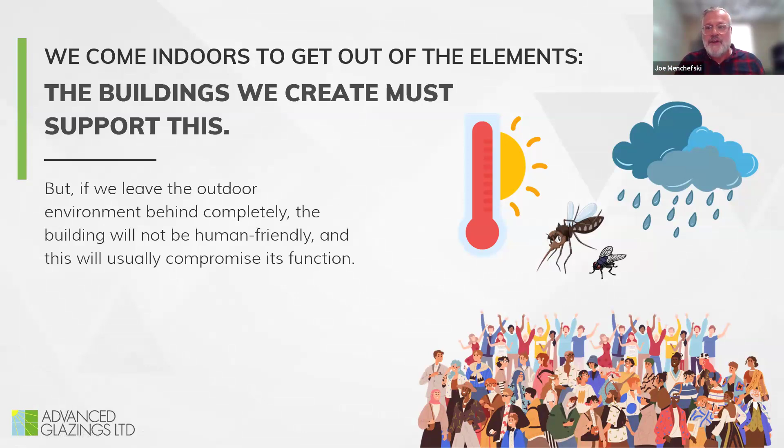All right. Look, so let's start by saying, why do we create buildings in the first place? It's to protect us from the extremes in the weather and potentially critters in some places, but usually it's the extremes in weather. What we've come to discover recently, and the evidence is just mounting constantly, is that if we isolate ourselves too much from the outside world, it has a really serious negative impact on our health, right? So managing that connection to the outside world is absolutely critical, and mostly it's done with the facade, right?

Now you've got two extremes, both of which are not ideal, right? One is where you just don't put any sort of windows, any sort of openings in the building, and you completely isolate the people inside from the outside. We don't want that ever to happen. And then the other extreme is if you had a building completely made of glass, which we're going to take a look at, which is equally problematic. Okay. What you want to do is get the balance right. And that's what we're going to focus on.

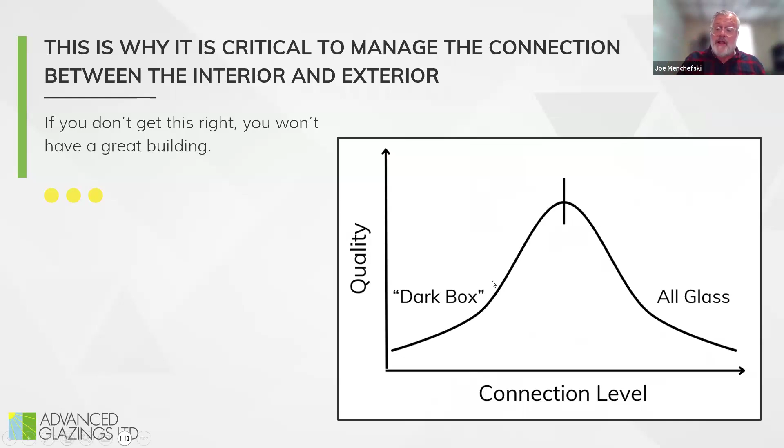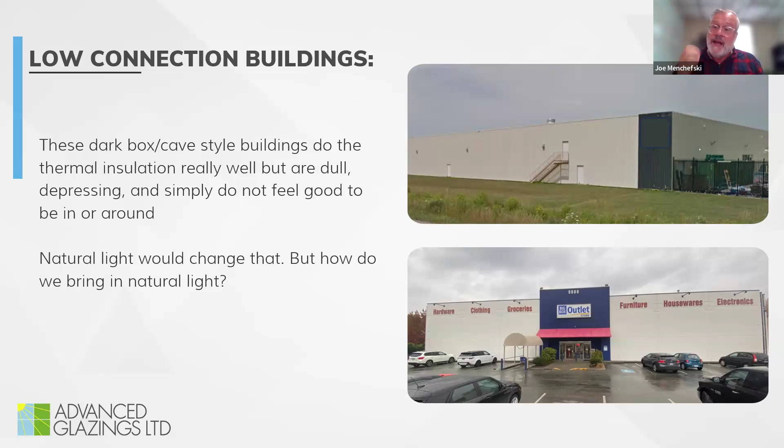Low connection buildings like these, they have a place, they have a purpose. As I said earlier, if you've got somebody coming in and going right out, or you don't have a lot of humans in there, it's cool, but they're not very interesting buildings. They're not a very high value building, right? We all know we're being driven as low on cost as we possibly can be when we create buildings like that, and that's what we're trying to avoid, right? Similar, sort of conventional builds. These buildings are not all that interesting. They're not exciting, and they're not all that pleasurable to be in, right?

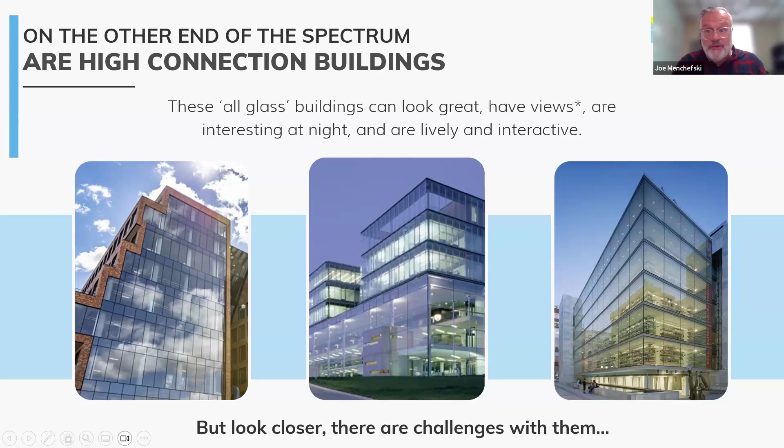Now let's go to the other extreme. Yeah, I know this isn't a big part of your world typically, but there's a lot of buildings that have been created that are just all transparent glass, right? And they're exciting, they're interesting, they're architecturally interesting, but they have some serious issues, and it's because they're too connected. All right. And let me explain that by showing all the issues.

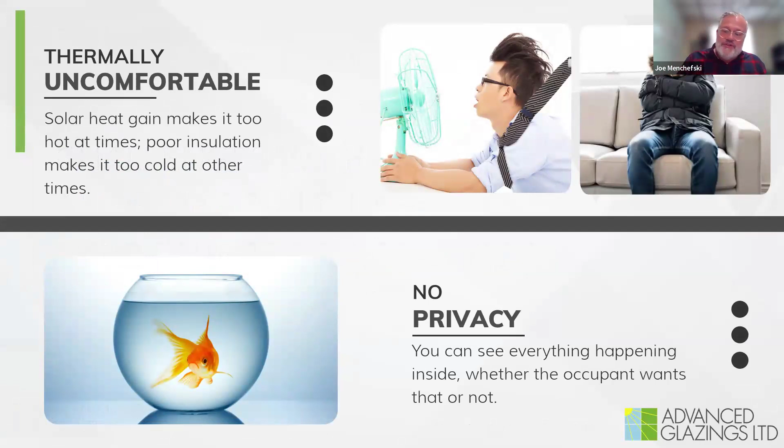First of all, thermally uncomfortable. We've all sat in the airport and had half of our face on fire because of the direct sun beaming on our faces. There's no privacy at all. The energy performance is crap, right? It's all R2 to R3 on the entire building envelope. So it's going to cost a fortune to heat and cool those buildings.

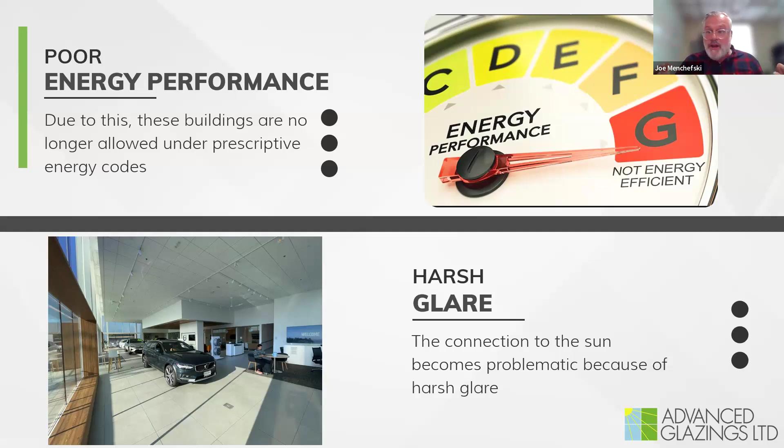It's also hard on HVAC systems too. If you've got certain areas that are bringing in a whole lot of solar heat gain and other areas that aren't, then it's much more difficult for the HVAC to balance all of that energy. So you don't want the hotspots.

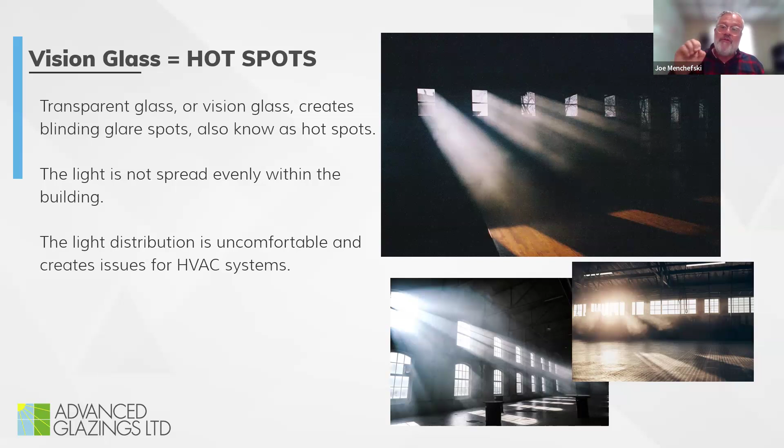Okay. Now, how do we end up in this situation where we have buildings that are too disconnected and then buildings that are way too connected? It's because historically we've only had two types of building envelope materials to deal with. One is elements that are completely opaque, right? Which you need. And then the other is elements that are completely transparent. It's binary, right?

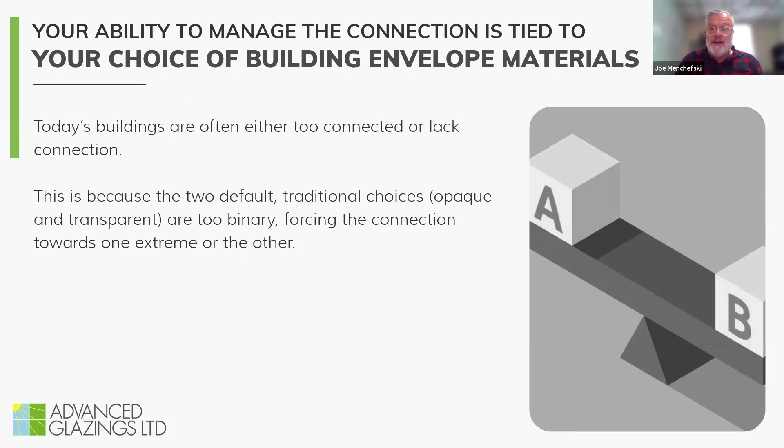And when you have those two extremes, you tend to have extreme situations in your design. When you look at all the things that you want in a building envelope material, all the boxes that you want to tick, we get most of them when we just have opaque and transparent. We get the good views. The opaque will provide thermal insulation and privacy, and the transparent component will add some excitement to your building.

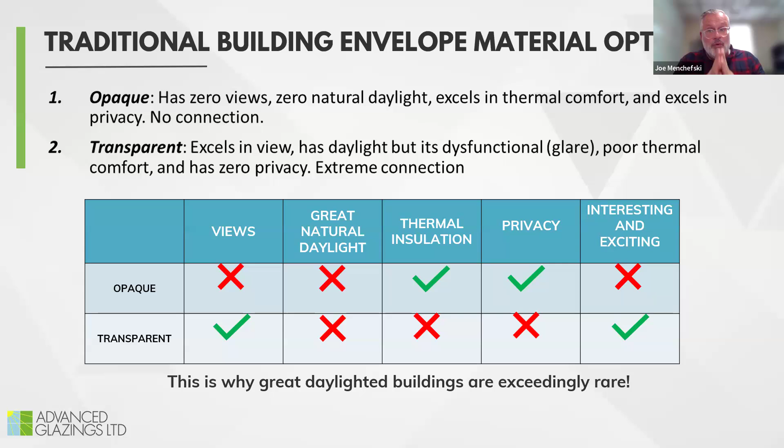But what you're not getting is the great natural light, right? The free natural light that makes us healthier and more productive. Okay, so what's the answer? What we're going to propose today is that the solution is what we're going to call an ideal translucent glazing, a glazing that brings in light and diffuses it and softens it.

So if you have an ideal translucent, look at the chart now. We weren't getting the great natural daylight before, but now we're getting it because we're getting a soft diffuse light that's going to spread evenly everywhere, get rid of the hot spots and get rid of the pain of extreme glare that is very difficult for our vision to adjust to.

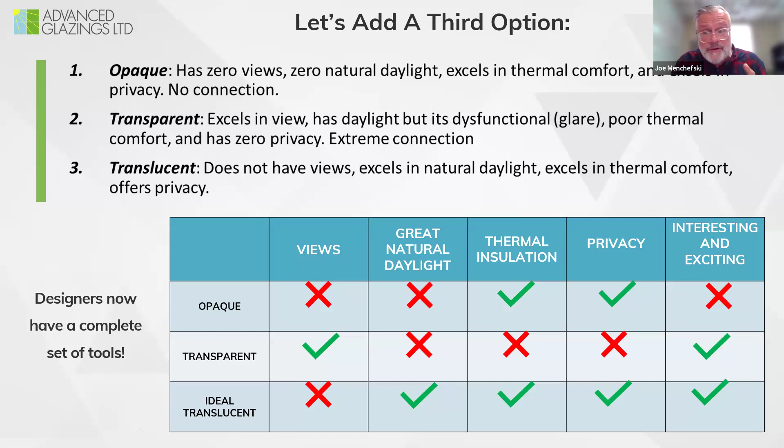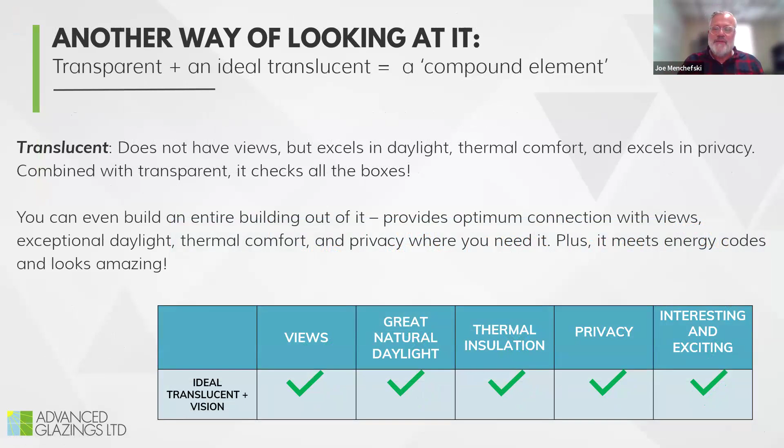We will still get high thermal insulation, and the ideal translucent will also have high levels of insulation. You're still going to get the privacy, and you're going to have a more beautiful building, and a more functional building, which is going to sell for more. You can actually get there with just transparent and translucent glass together, because the ideal translucent has such high levels of insulation that you'll actually be able to meet building codes now with just the two types of glass. Probably not where we're going, but I want to point that out.

Look at a couple of examples. The image up in the right-hand corner, probably typical of a lot of the work that you folks do. It's an ice rink, a skating rink. The entire place is being illuminated for free with 6 feet of clerestory around the perimeter because the translucent is spreading the light evenly.

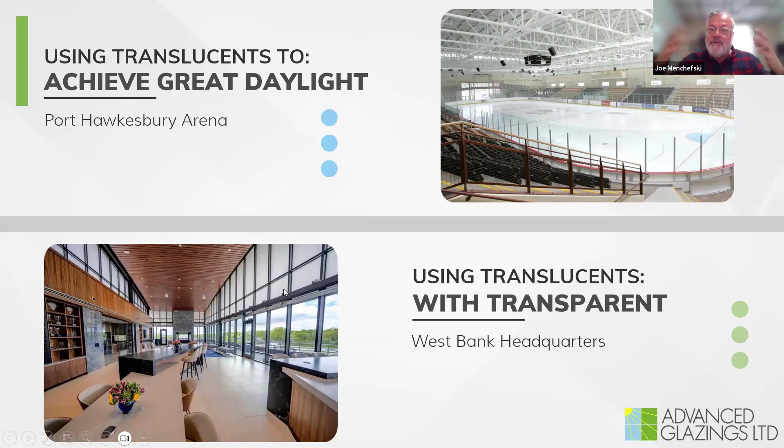Translucents and transparents together. How do you keep the blinds off the windows? You do it by making sure that the space is bright enough that the light that comes in through the transparent part is not going to be in contrast with the overall light level in the space. So they work together beautifully, transparent down where the people are to look outside. This would be like a reception area or something like that. And then at the top, you've got the translucent, which is your source for the natural daylight.

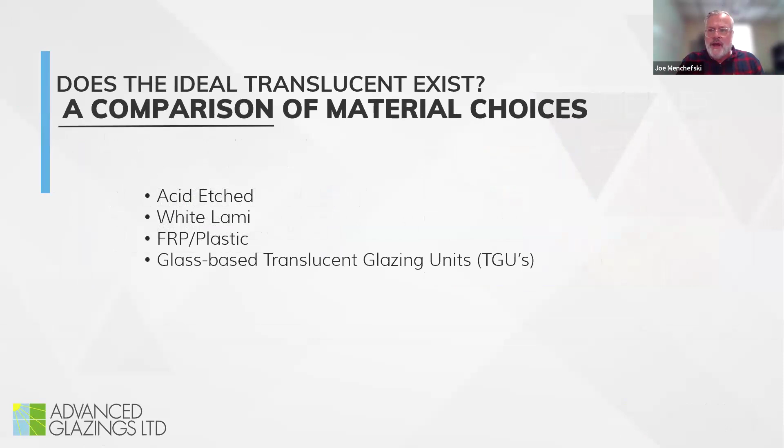Okay. So what's an ideal translucent? How do you decide what is the best thing to put on your building? Let's look at 4 of them, and we're going to then do an evaluation of the 4. We're going to look at acid etched glass, white laminate glass, your sort of traditional legacy FRP plastics, and what we believe is the answer, the glass-based translucent.

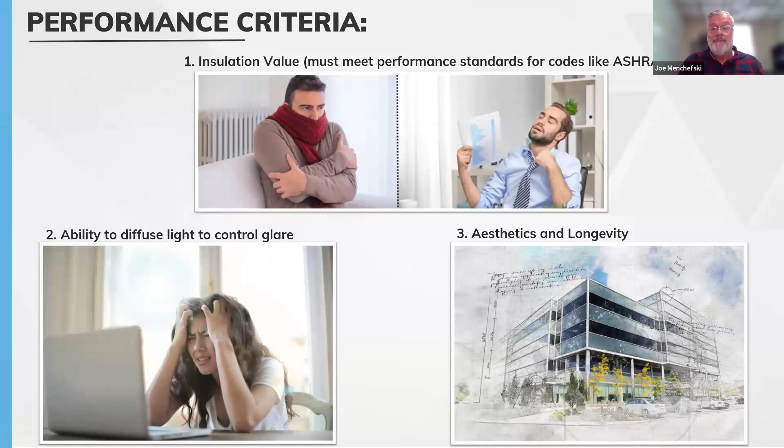Okay, and we're going to evaluate each of them against 3 criteria. The first being insulation value, the second being the ability to diffuse light and eliminate glare, and the third being the ability to last for a long time. Now, let's talk insulation.

If you want to get away from that 30% window to wall ratio, which is a prescriptive code, and just get to a performance code, right? So it doesn't matter how much window is there, then you need to get above a certain level of insulation value. You're not ever going to get there with a traditional IGU, vision glass, acid etched, or white laminate. You have to move to something that has a higher level of insulation.

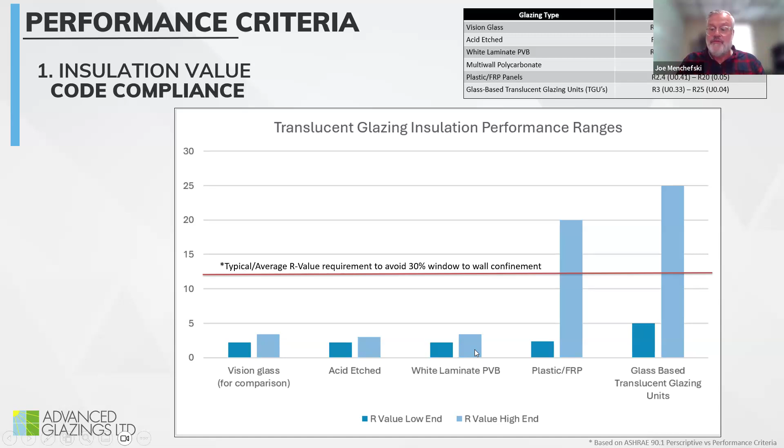Okay. Now we're going to talk about the ability to diffuse light, to eliminate the glare, to eliminate the hot spots. All right. And I'm going to introduce a new idea called light diffusion power.

Was there a question? No. Okay. Sorry.

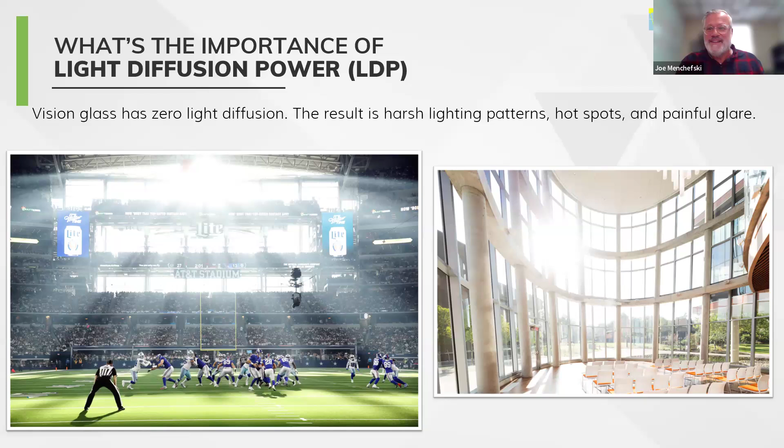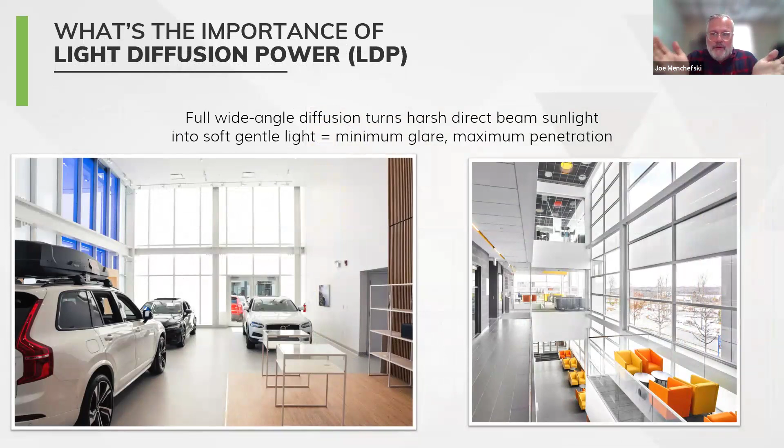Straight sunlight that isn't mitigated in any way is very problematic sometimes. We all know what's been happening in Dallas lately, and it really highlights the issues that come when you don't control sunlight. Poor diffusion can actually make it worse because you're directing some of that light towards your eyes and actually increasing the pain of the glare. In order to eliminate those glare issues, to eliminate the hotspots, you need to diffuse the light very broadly, spread it very evenly in the space. So let me introduce a simple concept called light diffusion power.

All right. Here's the experimental setup for measuring light diffusion power. You take a glazing sample, take your window, right? First you put an opaque backing on the window and you cut a hole in it. Shine a light down at 45 degrees, right? And then measure around this 180-degree arc around the back, and that'll show you where the light goes after it passes through your glazing.

Transparent glass, this first image in the middle here, is doing exactly what it needs to do. In order to be able to see through it, and views are important too, it cannot change the directionality of the light at all. So the light's coming down at 45 and it all strikes at minus 45. Perfect. Except for when it comes to glare, right? Because you get these bright spots, hot spots as we call them, and the image on the upper right hand corner is computer generated, but it really drives home how you get those really bright spots. We've all seen them, with the nice sharp edges on them.

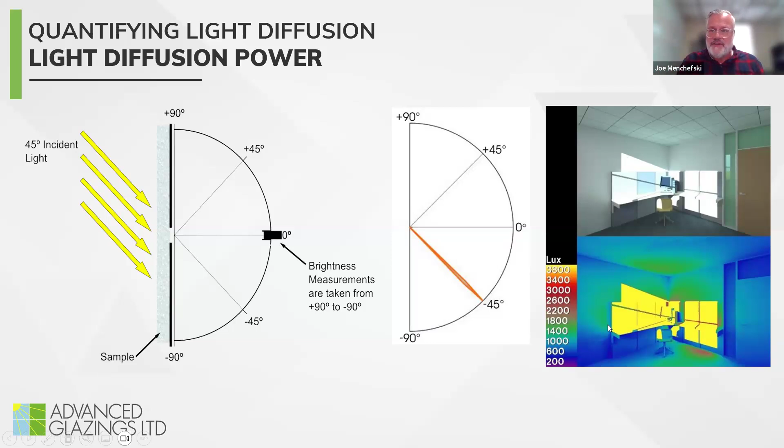Below is what's called a false color rendering. Don't worry about it too much, but what it's doing is being able to tell you exactly what the light level is in that space. So if you're building a building that's going for LEED or something like that, this can be very advantageous. It also helps to show that the contrast isn't too bad.

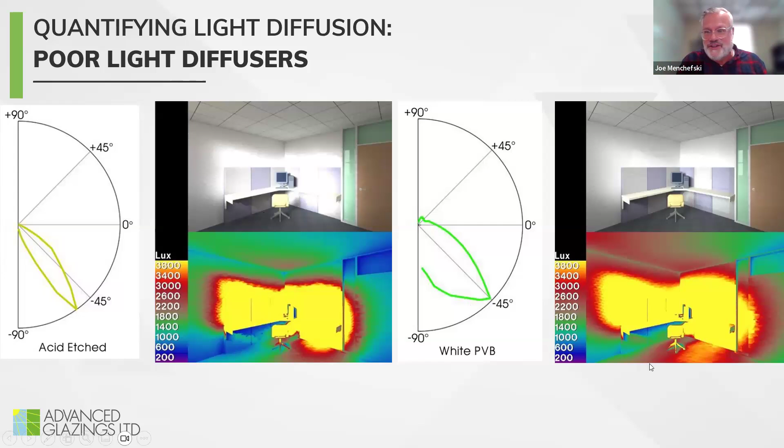Let's look at acid etched glass and white laminate glass as well. You can see from their charts that you're only spreading the light a little bit. All you're doing is spreading the light enough to give you visual obscurity, to give you privacy. They're privacy products, not products for bringing in soft, natural light, okay? Look at the way the light actually hits, right? You're still getting that really, really bright spot. The only difference is that the edges are fuzzy instead of being nice straight lines, okay?

And if it goes up, it bounces off the ceiling, bounces off the walls, and it goes deeper into the building. So you can get way more of the building daylighted without having to put skylights in a lot of situations. If you've got a big enough floor plate, you're going to have to do the skylights. But in a lot of situations, we can daylight a really large area just from the vertical.

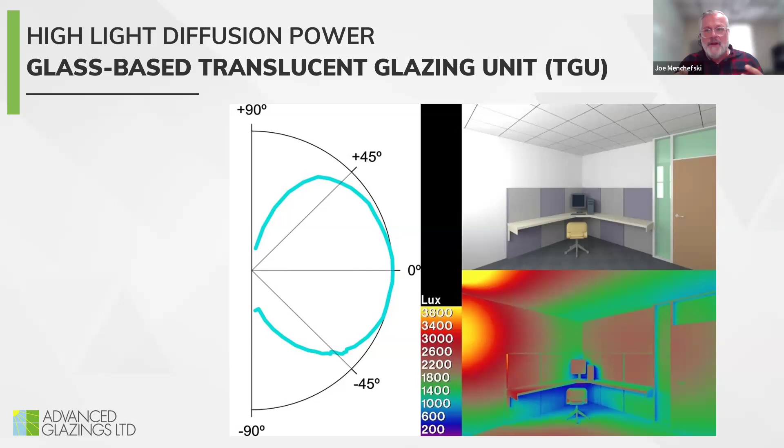Okay, again, let's review. You know, this is what vision glass is going to do. It provides your views, but it's not a good tool for bringing in natural light. Acid etched, not going to cut it, but a good high light diffusion power translucent will give you a nice even distribution of the light in the space.

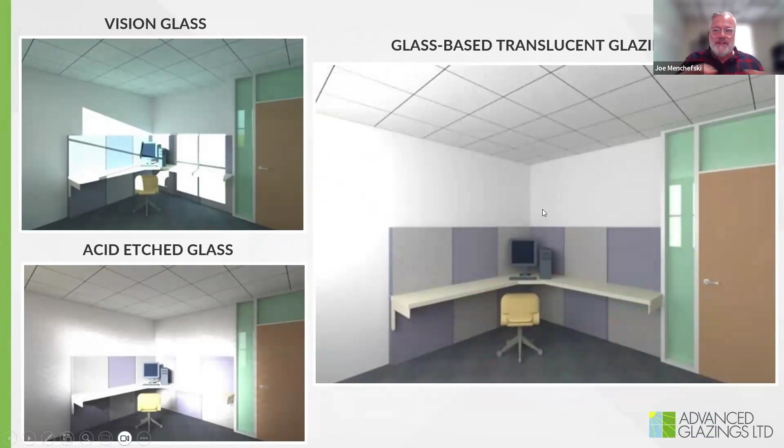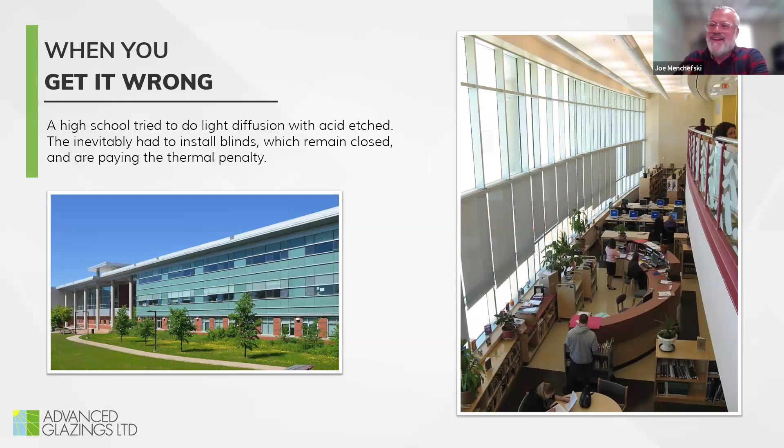All right. When you get it wrong, this is a school up here in Canada, close to where I'm sitting today, where they decided that acid etch was going to be adequate. And almost immediately upon moving in, they had to put blinds up and completely cover those windows. So now they've got a big section of wall that's about an R2, right? And they can't see through it. And it's not bringing any light in because they've covered the glazed area. Doesn't make any sense at all.

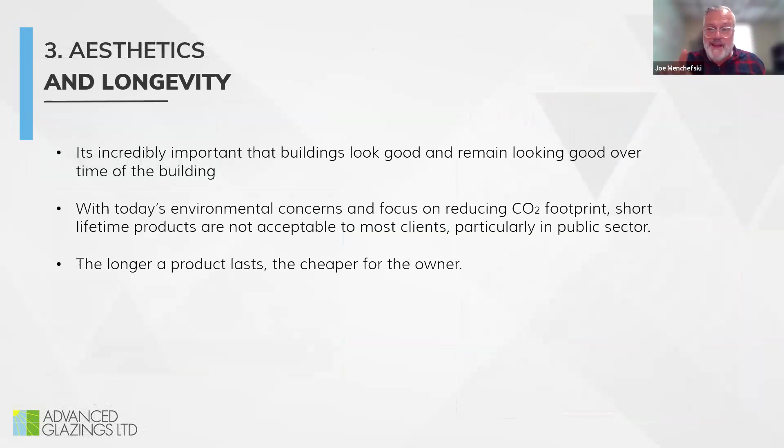Okay. Anyway, so we've talked about thermal insulation. We've talked about the ability to diffuse light and eliminate glare. Now let's talk about longevity and aesthetics, right? It's important to think about how long things are going to remain on the side of the building if your objective is to build a higher value building. Okay. Let's talk about aesthetics and longevity in the context of the four translucents that we're looking at.

Acid etched, it's glass, it looks great, it's always going to look great, right? Same with white laminate. Some people don't think it's all that beautiful because it's kind of flat, but I think it's just fine. I like the white aesthetic. Glass-based translucent, it's glass. It's gonna look good from day one. It's gonna look good in 50 years.

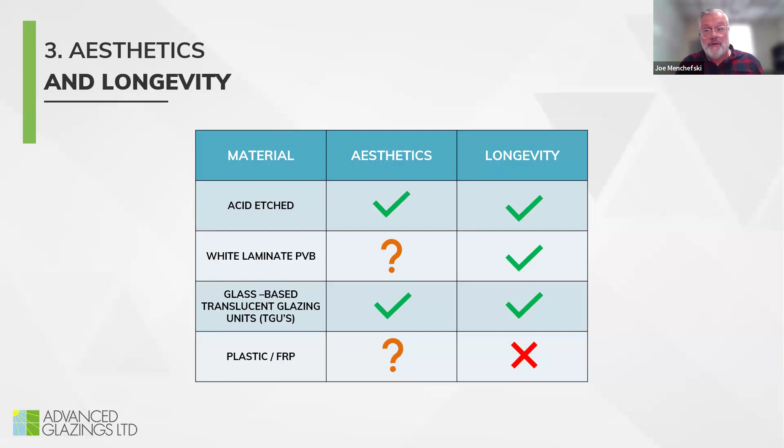Okay. Plastic is your issue when it comes to longevity. Some of these plastics do an amazing job with insulation, and they also diffuse light very, very well, but they're plastics. Okay, and what that means is the moment they're put out in the sunshine, the UV light starts bombarding them, and you start to shift color almost right away. All right, so let's take a look at that.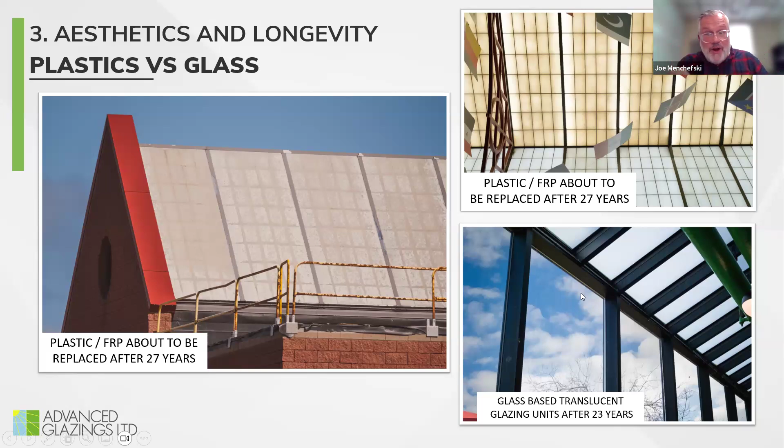Look at the glass-based translucent on the bottom here. It was installed just a couple of years later, and I could take you all there today, it looks the same today as it did the day it was installed.

Just to drive the point home one more time, this is an actual untouched photo of a project that was done in multiple stages. The image on the left has the glass-based translucent. The image on the right still has the older FRP plastic in there, and you can see the yellowness. It looks dingy. It actually looks dingy everywhere inside of that side of the hallway because the brownness of the plastic is changing the hue.

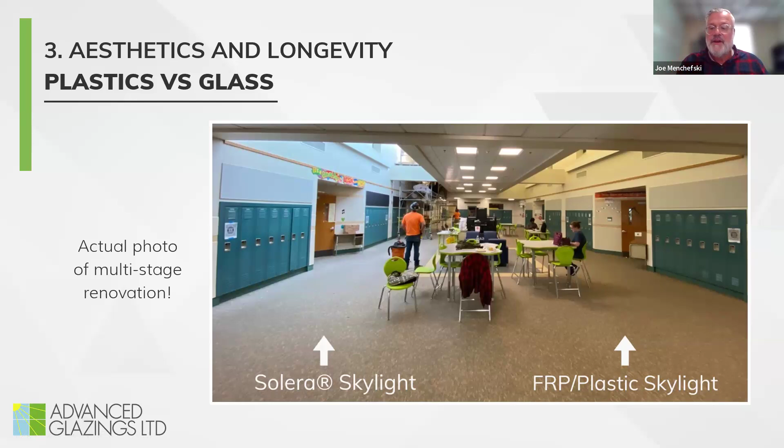Right. So again, if you're looking at something that's going to be close to town, it's going to be a community center, it's going to have a lot of people coming and going from the building, you do not want to be putting a legacy, single-use, short lifespan plastic on the building envelope. Okay. And it's costly, right? Each time you have to do a replacement, it's costly to the owner of that building because you're also seeing inflation. So each replacement is going to cost more, right? So instead of putting something on that you only have to put on once, you're putting something on that you have to put on at least 3 times.

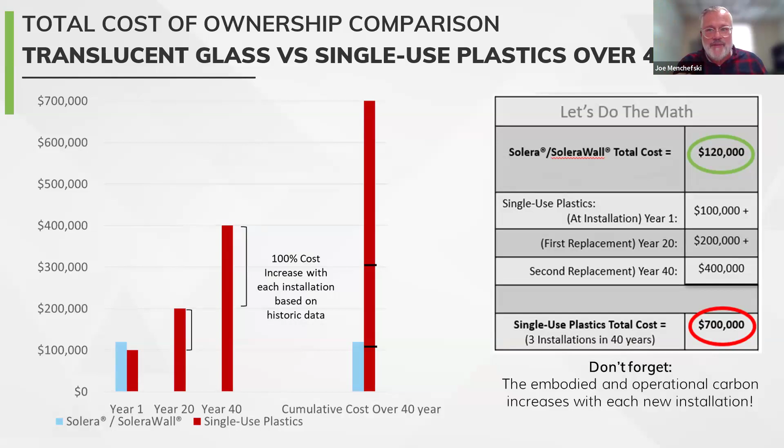And for people who are interested in sustainability, that's embodied carbon every single time you have to do the replacement. It's energy consumption every time you have to do the replacement. It's not optimal, right? So, summarize all of that. Acid etched and white laminate, they look good. They're going to last a long time. They're not there to help you light a space, right?

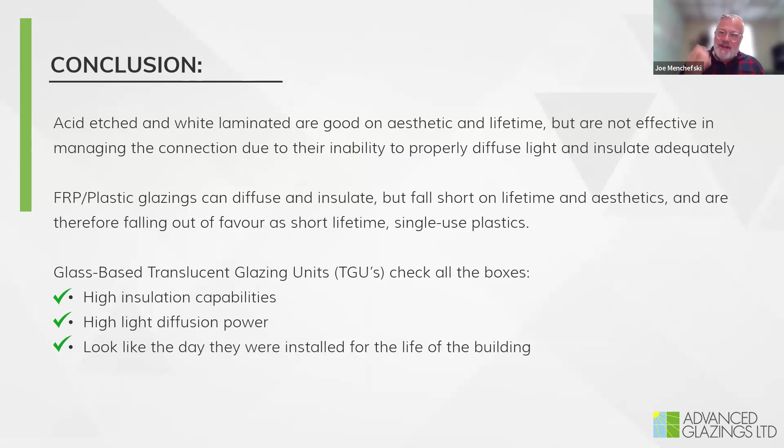Plastics, brilliant invention, and they still have their place, right? But if it's closer to a place where there's traffic, where people are going to see it, and where some pride of ownership is important, you don't want to do that. If you've got humans inside and you're asking them to work in yellow spaces, that's not optimal either, right? So the glass-based translucent actually checks all of the boxes on the criteria we just discussed.

Okay, that's how we get to the balance, is by adding that third element. The translucent allows you to bring natural light in, right? You don't need to have all that transparency, right?

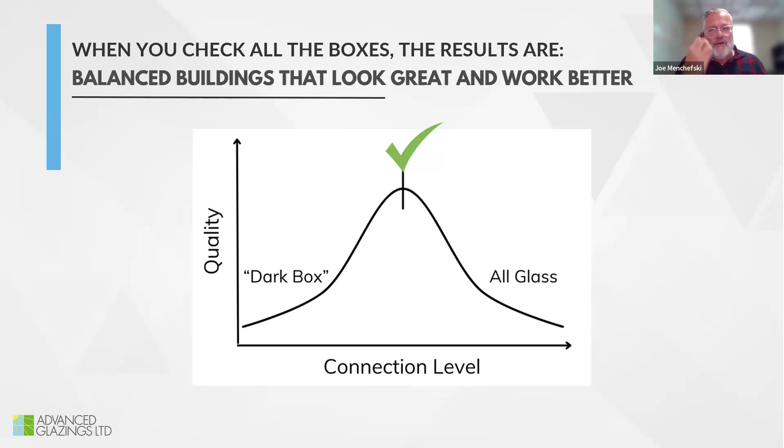And you don't need to eliminate the opaque elements either. It doesn't make any sense. You can have a relatively small glazed area and bring in a whole lot of natural light without cutting a whole lot of holes. That's the key, right? Get the balance exactly right. And you can create these really nice looking spaces.

Okay. For the architects in the room, everybody who's survived me chatting so far, guess what? All of you have earned your AIA credits, and bear with me for just a little bit longer.

I want to talk about Solera and Solera Wall. And then we're going to talk about integrating it with Adam's product in order to make it really easy and cost effective to get it into your buildings. Now, how does Solera work? You got light diffusion, you got high levels of insulation. Here's how you achieve both.

First of all, the light diffusion. We put a glass fiber veil on the inside of the IGU. It's that simple. The glass fiber veil is amazing at diffusing light, and we figured out how to attach it to glass without it ever degrading. Okay, we also have this honeycomb structure, right? Series of little squares in between the 2 panes of glass, and the little squares break up the convection patterns, right? So if the air is not moving between the 2 panes of glass, you get much higher levels of insulation.

If anybody hasn't heard of aerogel, aerogel is a relatively new material that is the most insulating material known to human beings, and it also transmits light. So if we can fill in all the little squares from the honeycomb, fill it up with aerogel, we can get crazy high levels of insulation. I'm talking R18, R25, right? So now we're into places, freezers and cold storage, those sorts of things. You could actually bring light into certain parts of the building and not compromise the insulation levels.

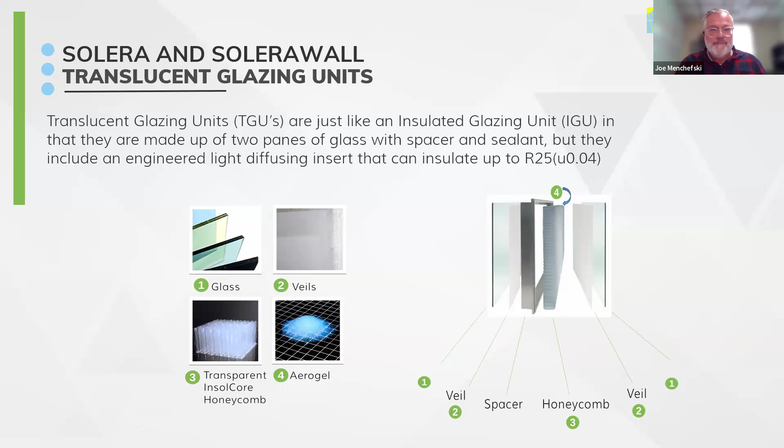Okay. How does it work? How do we get daylighting done properly? Let's talk. It's really easy in the sort of broader areas where you're going to have lots of height and you can just put the windows up nice and high, diffuse the light, and you can illuminate a large area with a relatively small amount of Adam's windows.

But when you're down at floor level, and I'm thinking reception areas are very, very typical, you want the view in many cases, but you don't want them to end up with blinds on the window. So you put the two of them together and you can have both view and daylight. You can literally have your cake and eat it too. All right. So transparent, the light comes down, creates the hotspot on the floor, but it gives you your view. Translucent, right, spreads evenly, illuminates the place beautifully, but you don't have your view.

But if you put them together, here's what happens. Put the translucent on top, the transparent down the bottom where the humans are. The light still comes through the transparent and still creates the hotspot, but it's not much of a hotspot because the translucent is illuminating the whole space. So the ambient light level, right, the entire space gets brighter. The entire room gets brighter. And so even though there's a bright spot on the floor, it doesn't look that bright. It doesn't feel that bright.

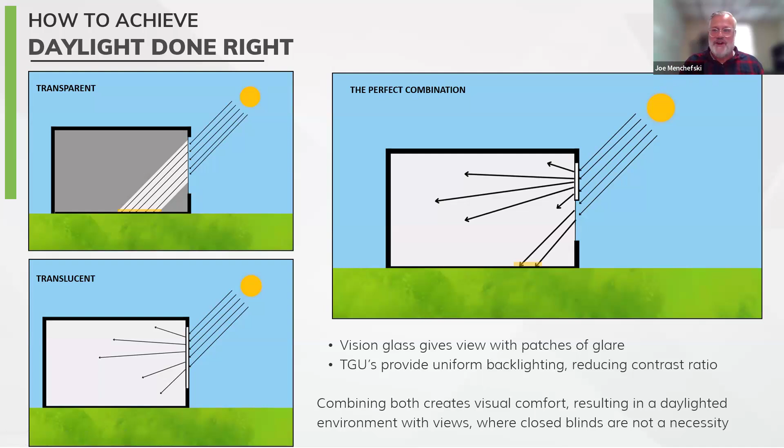It doesn't mess up your HVAC as much because there's energy already coming in. There's light already coming in, and you don't get this really high contrast, and you don't feel the need to put blinds on the windows because you're not experiencing glare. I hope that makes sense. Okay, and we do a lot of this kind of work where we've got the translucent up high to illuminate and the transparent below in order to provide the views.

I'm going to talk quickly about modeling. Okay, there are computer models that can show you exactly what's going to happen inside your building when the sun hits it. Okay, for example, in the upper right hand corner here, and by the way, we do this for free. So if anybody's interested in talking to Adam, or, you know, to put his Solera in Wintech windows into your building, we can model it.

We can show you how much area you need and what it's going to look like inside with and without. Anyway, upper right hand corner in this hockey rink, this is the original design. It was all transparent. That glare pattern is not going to be acceptable. It's uncomfortable, and it also will melt the ice in that area. You have that much solar heat gain. Replace it with Solera on the bottom, and that's what the model shows, that the glare is eliminated.

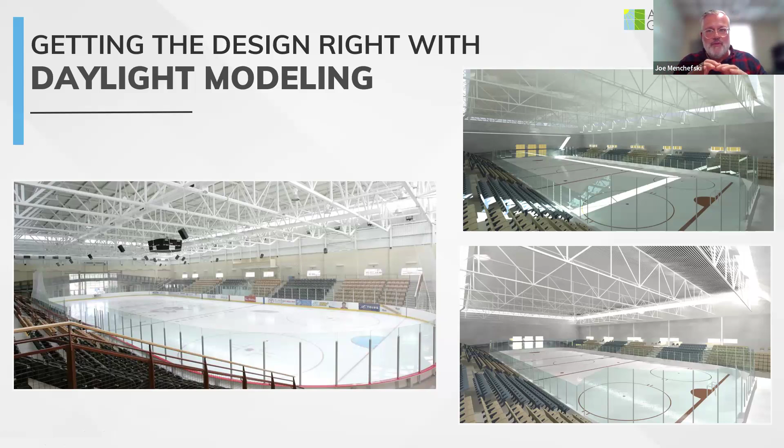The image on the left is an actual photograph of that hockey rink taken from the same angle. That is a massive, massive space, a massive open area, and it's all being illuminated with just 6 feet of clerestory. That's my point from earlier. You can do daylighting with way less window if you diffuse it properly.

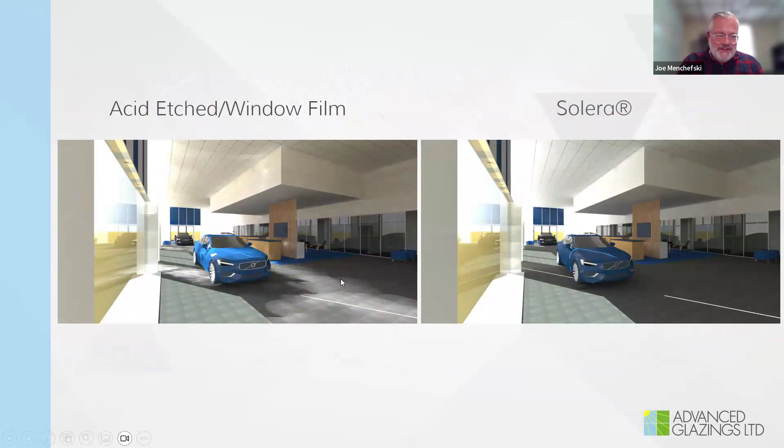Right, back to the Volvo dealerships. You know, this is modeled with an acid etch window plus film, and you can see you've still got glare spots that are pushing deeper into the building. Look at almost the entire floor space where your customers are going to be is suffering from glare. Right, that is not optimal.

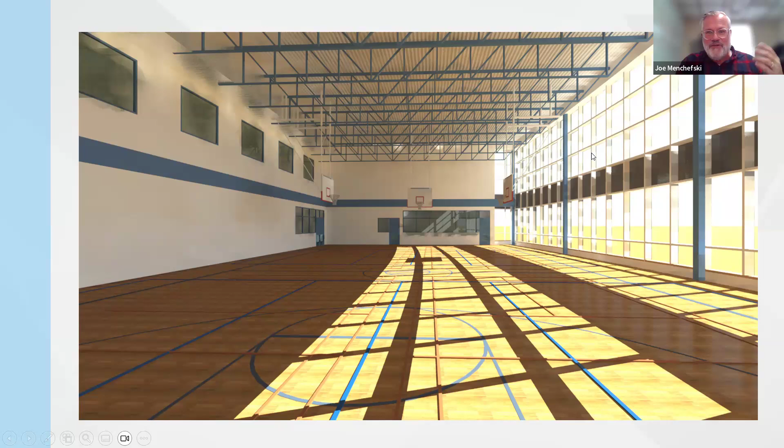Right, this is a very typical situation for us. Gymnasium, transparent glass from floor to ceiling in the original design. That glare pattern is just not going to be acceptable. You won't be able to play basketball there. Replace the top section with Solera. You can see in this simulation, the light is actually bouncing off the ceiling and filling up the space. And this glare is not going to be an issue because the overall ambient light level is so much higher.

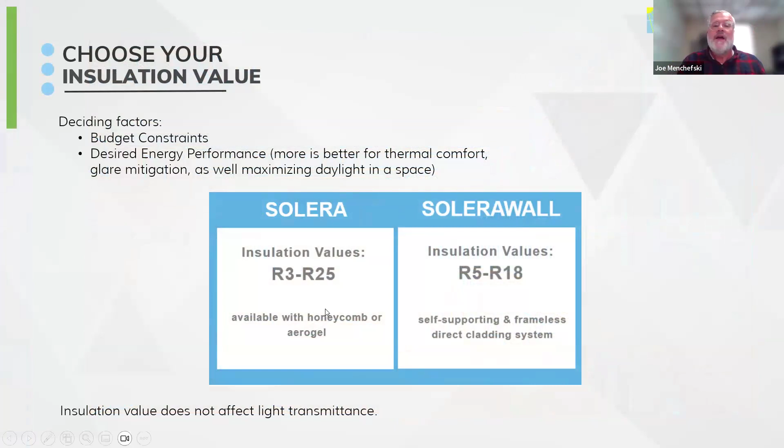Okay, two different types: Solera and Solera Wall. We're going to focus on Solera today primarily, but I will introduce you to Solera Wall. Insulation levels ranging from R3 all the way up to R25. The only difference between Solera and Solera Wall is how you put it on your building.

Okay, so let's talk integration. Solera will fit in sort of your traditional framing where you bring in a glazing contractor and install it into the building, but we're going to show you a better way to do it today. I'm going to introduce Adam again and have him come back and talk about how Wintech has integrated Solera into their framing system and the advantages that come from that.

Adam? Okay, thanks, Joe. I will give a shout out to Bruce Forster with Stewart Berger Construction. He introduced Advanced Glazing and Wintech, and it's been a good partnership from the get-go. I've been in the metal building window business for a lot of years, and I have spoken to countless numbers of builders trying just to get extra light into the building. And when I saw this product for the first time, I was like, wow, this really checks some boxes that the builders are really looking for.

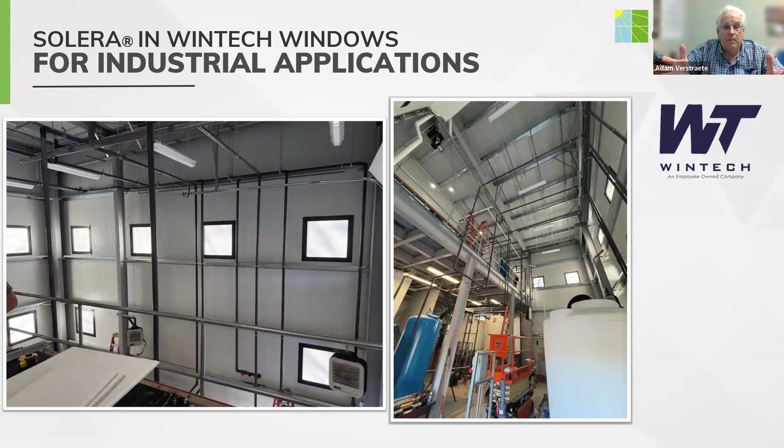Wintech specializes in windows for metal buildings. We make a lot of designs for a lot of different wall panels for punched opening applications. Self-framing, self-flashing allows the builder to install the window fast and easy, and you're putting a window in that's made for the specific wall panel you're dealing with.

This is a job we did for Art Hance. I think a lot of you guys probably know who he is. This is an insulated wall panel, an IMP. It's our standard InsulView window made for the IWP application. And you can look inside this building, there are no lights on. And just look how much light is radiating in that building.

I really liked this product from the get-go. And when I saw that picture, that was one that's really like, wow, that's something. But what really sold me on this product, and I'll tell you this, I went up to Nova Scotia, where these guys' headquarters is, and we toured some buildings. And we were touring the power plant of a hospital that was being built near their office.

And in that office, there was a set of windows, very similar to the windows above the garage doors on the right. About 12-foot by 3-foot running windows in this. It was a boiler room for the power plant for the hospital. The workers were in there installing the boiler with no lights. There was no electricity in the building yet, and they did not have any remote workspace lights put up. They were working on it just with the natural light coming in through the Solera windows in that room.

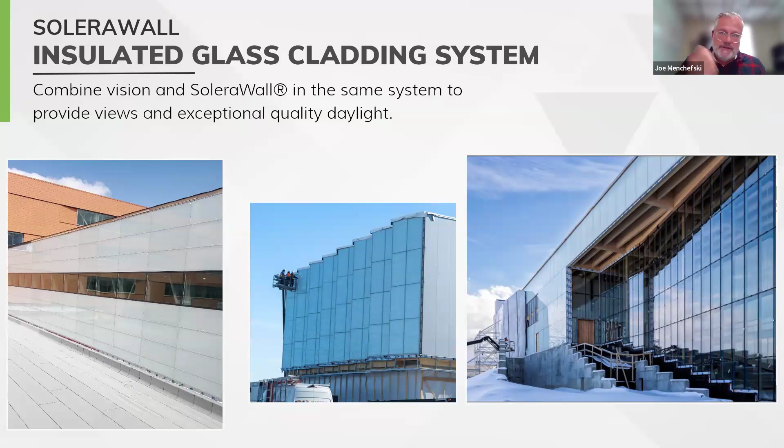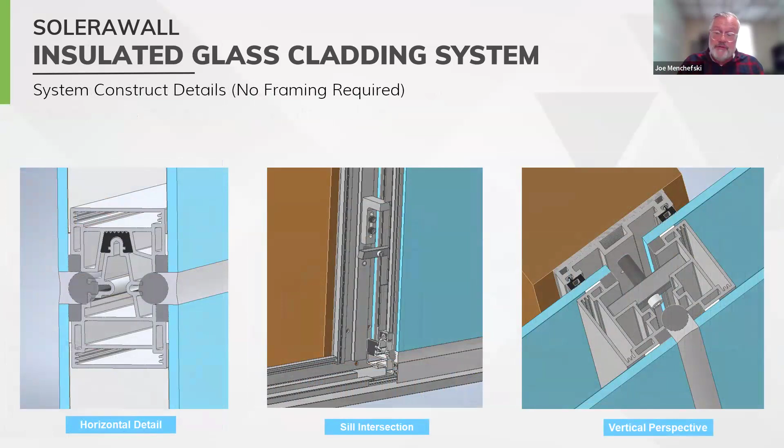Let me introduce you to Solera Wall. This is for really large glazed areas, and it's a panel that doesn't need any framing at all. All right, the panels click together analogously to an insulated metal panel, or sorry, an IMP. Right, they're thicker panels, and the spacer on the IGUs can be designed with a tongue and groove design so that they click together.

Here's a really large job that we did recently, and it's like 13,000 square feet of glass on the outside. Not very typical. This is a little more typical. This actually works out to be about a 30% window to wall ratio, believe it or not. But look inside the space, right? This is what I really want to drive home. Look how bright it is in there. Look how comfortable it is in there. The hot spots are absolutely minimal. It's a very comfortable place to be, right?

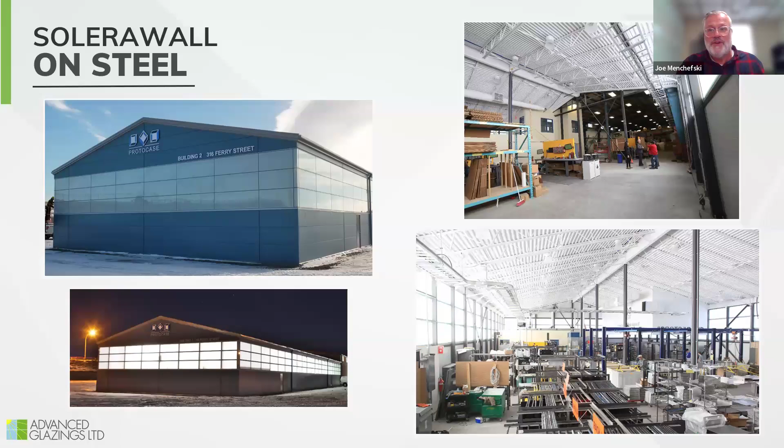You're going to have lower absenteeism, lower turnover, all those things that really, really matter. And remember, I talked about the lantern effect, the glow at night, right? This building, it's an industrial park, but it's close to like an overpass bridge. So everybody driving by sees this building, and they all know what it's all about and what they're doing there. So, when you're recruiting, very valuable.

Okay. That is basically it. I just want to drive one more thing home that Adam spoke of earlier. We are here to help. Call us. We can do the modeling for you for free. We can help with building envelope thermal calculations. Adam can help with insulation, and together we can come up with optimal location of the windows to maximize the amount of light that comes in and minimize the amount of money you have to spend on glazing in order to get to that maximum amount of light.